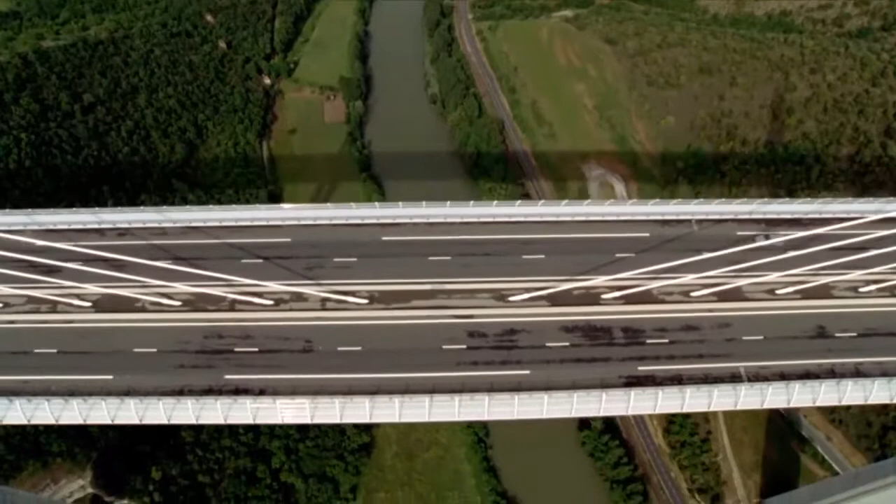It's a ribbon 2.5 kilometers long, vast spans, but a very, very slender structure. It's tree-like in terms of its cables, and the color of the cables is very much the color of the sky - a very conscious design decision. It's about transparency, it's about locking into the view. It's a humanistic vision of what infrastructure might be, and it has quite an interesting story in terms of the way it performs.

In scale, the tallest of these columns is something like 17 meters taller than the Eiffel Tower. It creates a shortcut - before this viaduct, you would have a tailback of some 35 kilometers with 5-hour delays going through Millau, through the local region, instead of being able to leap across the great valley. If you consider that something like 1,500 trucks cross this viaduct daily, and the journey time between Paris and Perpignan is reduced by 1.25 hours, then that translates into something like 36,000 metric tons of carbon dioxide saved. So the analogy with the tree is in many ways quite apt.

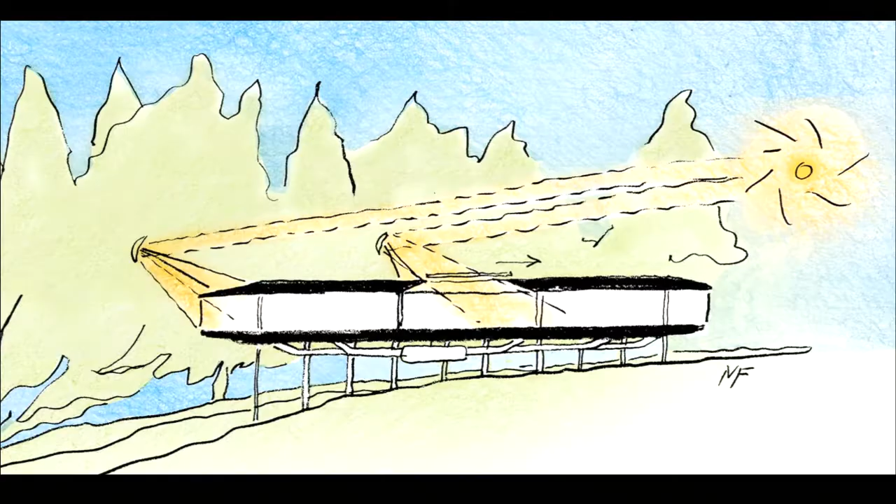The idea of the sky as a generator, which embraced all the projects I've been associated with, encouraged me to look at some unbuilt projects. This sketch is of one of several pavilions conceived for the Fred Olsen organization in the 1970s, the early 70s, and the site was a forest. Many of the much larger buildings, the skyscrapers and so on - all the principles are here.

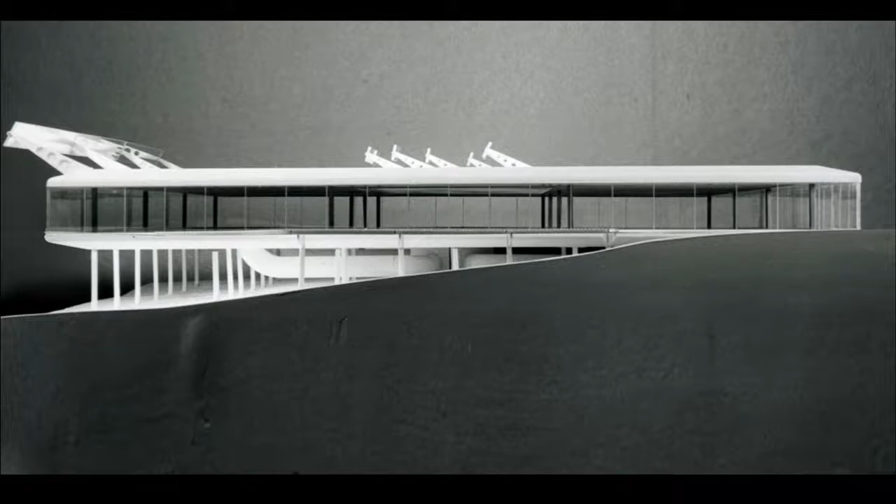Reflectors which pull sunlight deep into the building in the low winter sun, hovering over the forest floor and extracting cool air, working with nature, reducing the high energy consuming traditional air conditioning systems. Again, just sitting very daintily in its forest setting.

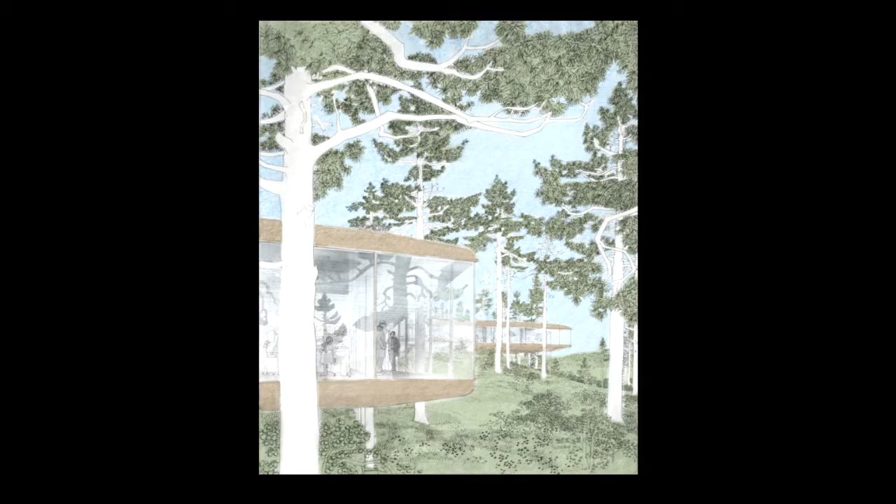An earlier project, still from the 1960s, the Skybreak House - its relationship to the landscape is much more of the landscape. It grows out of a slope, contained between two houses in a residential area, so it focuses the views, and you have the kind of poetry of feeling that you're not in an urbanity, but basically it's about the sky and it's about the distant views. This steps down the hill, as you can see here, growing out of the landscape.

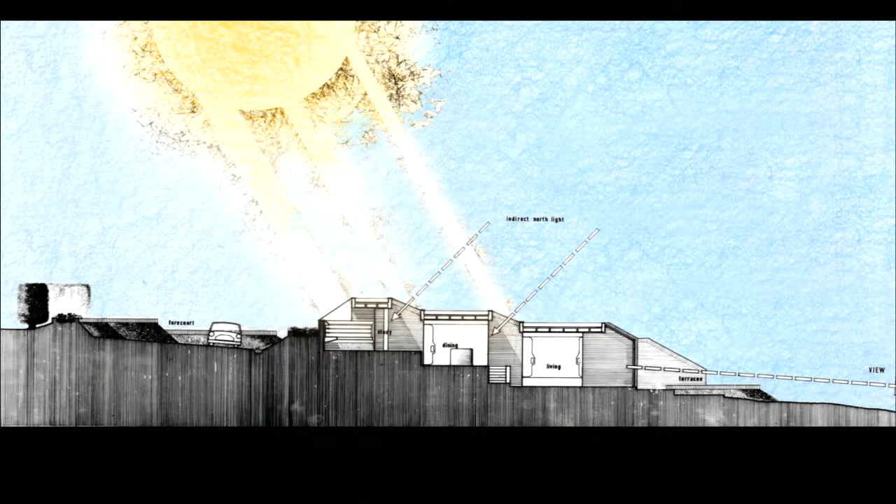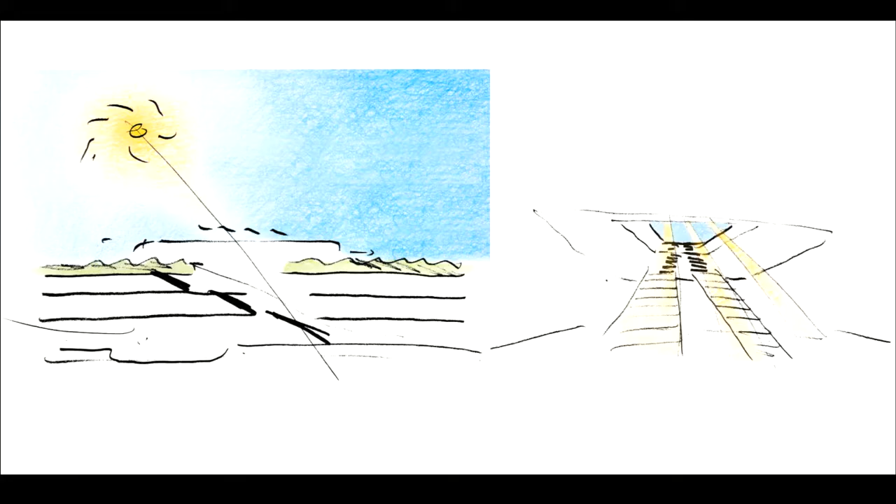If we take a slice through that building as a cross-section, again the early sketches show the sky as dominant, and when that's translated into a building, it is again very much at harmony. Whether it's for a small home or a major office complex, the Willis Faber building also of the 70s, the concept sketches, when translated, are very much about moving up towards the sky, embracing the sun, creating landscape on the roof. This becomes a transparent building at night, but during the day it engages with the clouds, with the sky, and with its urban surroundings.

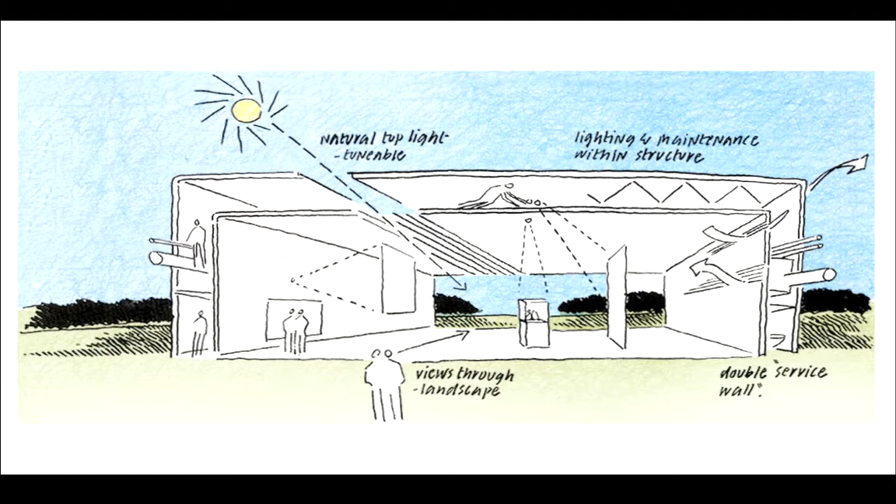Those principles of an ecological, low-energy building, a building that would be humanized and brought alive by its dialogue with nature. This is the concept sketch for the Sainsbury Centre, an arts complex and a gallery for the extraordinary collection of the Sainsbury family. And it is very much a kind of light box.

It can control the light, so it could be blacked out in the way that this space is here, or it can embrace the light.

Again, talking about light and lightness and the kind of theme of flying machines.

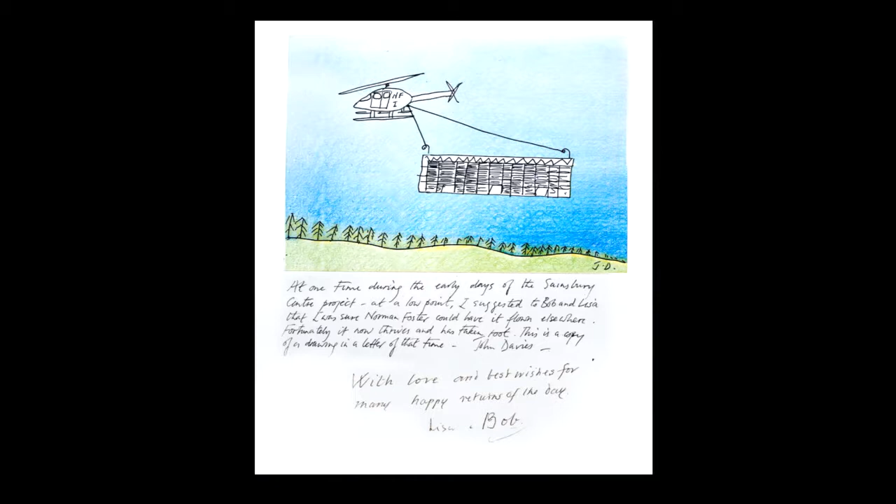Rather amusingly, on the occasion of my 60th birthday, the Sainsbury's presented me with a drawing by an artist. They were going through a rather difficult period at the time—I think it was a period of student unrest, and the building wasn't being as well received at that time as it has been since. So this artist suggested, rather whimsically, that it was so light a helicopter could come along and take it somewhere else.

That theme led, in the late 1980s, to what you might call the reinvention of the airport terminal as we know it. This was pretty typical at the time of that commission. I remember Norman Payne, who headed up British Airports Authority, an engineer, saying at the time that he felt it was time to create a new generation airport.

To achieve that, what we did was literally turn this diagram upside down. This is a solid roof—it's full of ducts and machinery, heavy equipment. It's pretty closed, you don't know where you're going. It's disorientating. It was typical of the airports of that period.

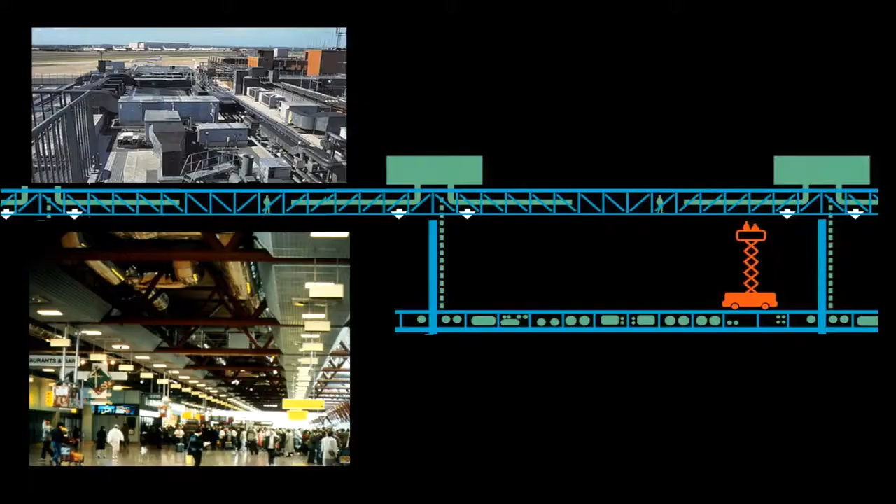If you took a diagram of that, you'd have a kind of roof structure which is more bridge-like, solid. On the left at the top, you can see what that roof would look like in terms of its equipment, and the space below, which was pretty soulless. Also quite high energy consuming, because if you're blocking out the natural light, then you need artificial light. The artificial light generates heat, therefore you need cooling—all very expensive and high maintenance.

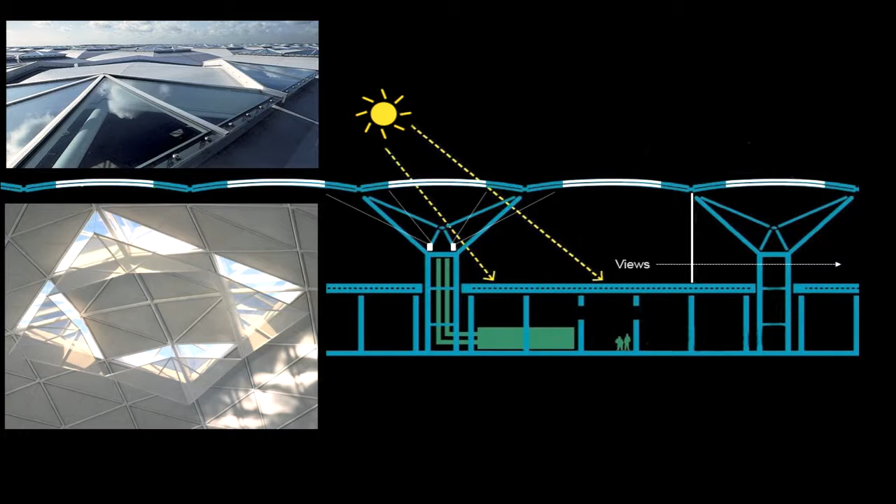The solution was, as I say, to turn it upside down, put all the heavy equipment where it sits more comfortably on the ground rather than up on the roof. It's also easier to get at. Once you bring the light in, you have a totally different experience. So it really is harmonizing with nature, working with the sky, reducing energy, and producing a more joyful place where you can really see the elements and the aircraft you're going to.

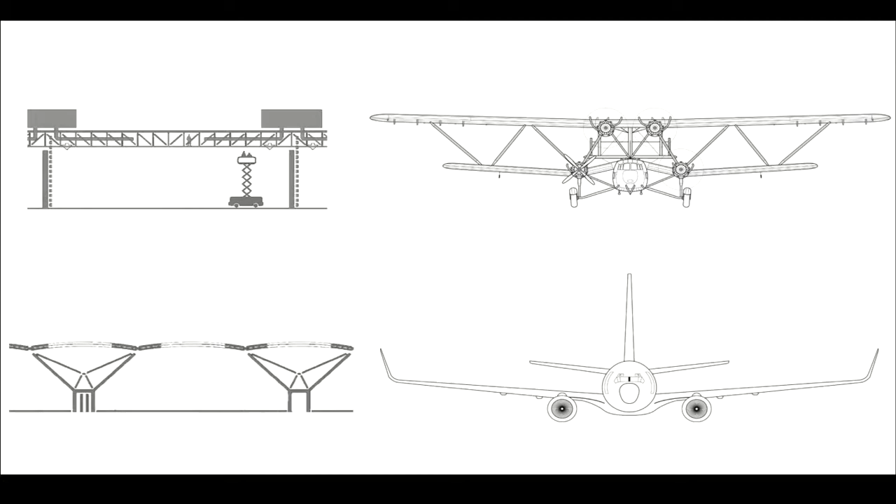It crossed my mind that, in a way, the cantilever is emblematic of modernity. There are interesting parallels between the early passenger-carrying aircraft, the biplane, which was a bridge-like structure, and the Stansted kind of breakthrough, which is very much a celebration of the cantilever—something we take for granted in terms of modern aircraft.

If one elaborated this theme further, at a particular point in time you'll see everybody is doing the cantilever steel tubular chair, for example.

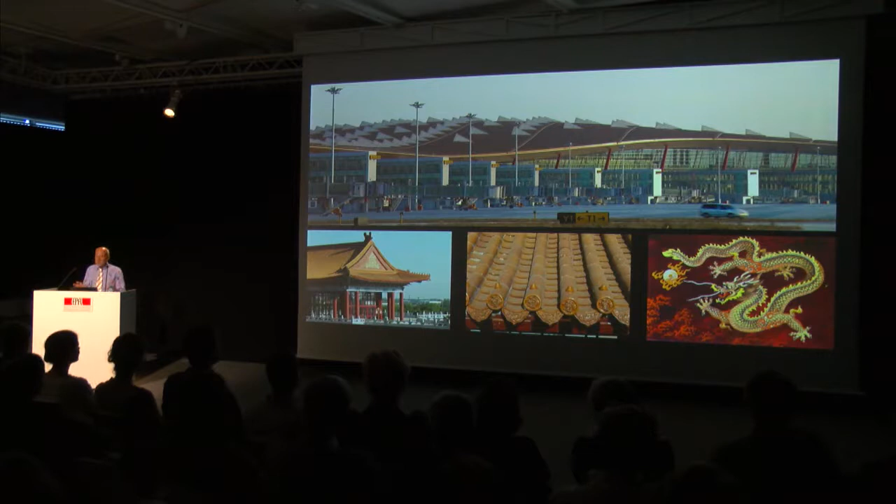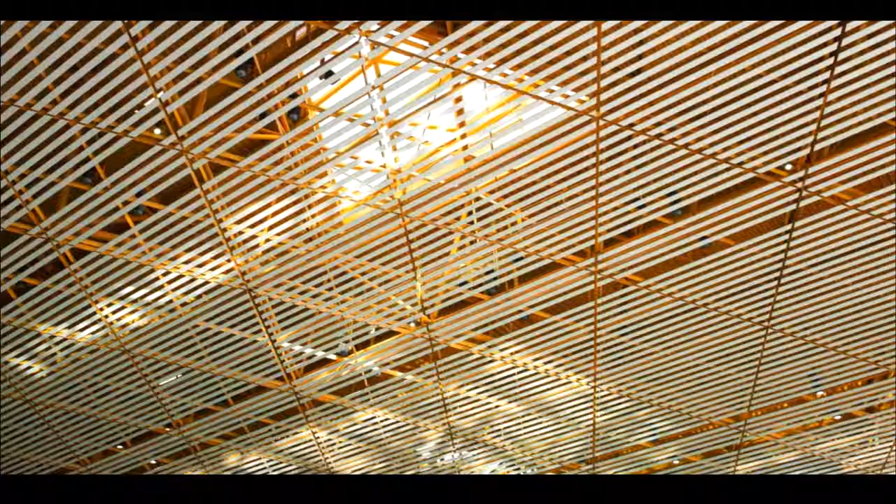In local folklore, it's not just about capturing the sky, but it's also referred to as dragon-like in its appearance, picking up on the tradition of the colors of the Forbidden City, integrating those colors we most associate with China: the range of reds through oranges, through yellows, through golds. Those colors permeate the project and color, almost literally, the sky, the great umbrella over these vast spaces. But the building is actually referred to by those who use it as very comforting.

Although it's very large in scale, if you compare this building with, say, 5 or 6 terminals at a Heathrow or a Kennedy, with an internal rail, then it is very, very comfortable.

It's at this point in the evolutionary cycle of airports that I questioned whether the next move might be to take away the columns, take away the idea of a roof and walls and connections to the aircraft all being different components, different languages, and questioned whether it wouldn't be possible to create one seamless umbrella which would curve, arch, at one point become the roof, another point become the walls, reach out and connect with the aircraft—something more organic.

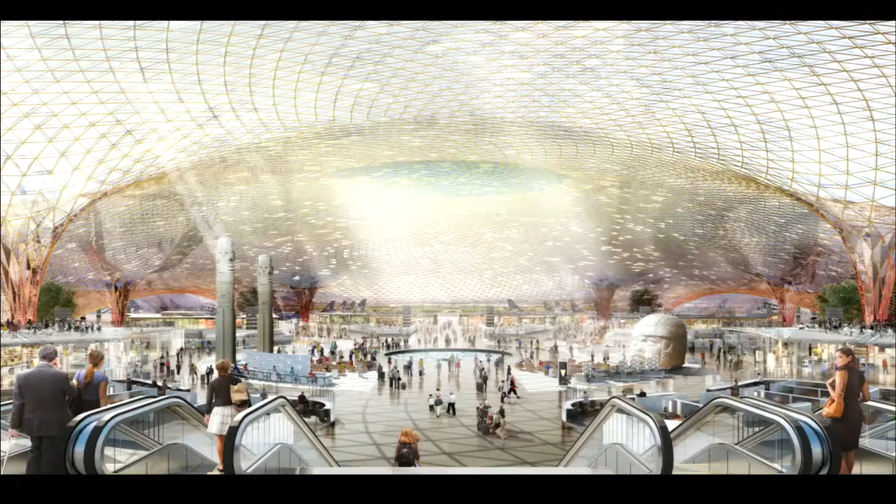Could, for example, the more traditional 36-meter span between these columns be 100 meters, 170 meters? Mexico Airport, which is smaller than Beijing but larger than Hong Kong, somewhere in the middle, is a competition we won last year, now under intensive design development, to break ground early next year. You can see here the heroic span, the way that membrane comes down to the ground.

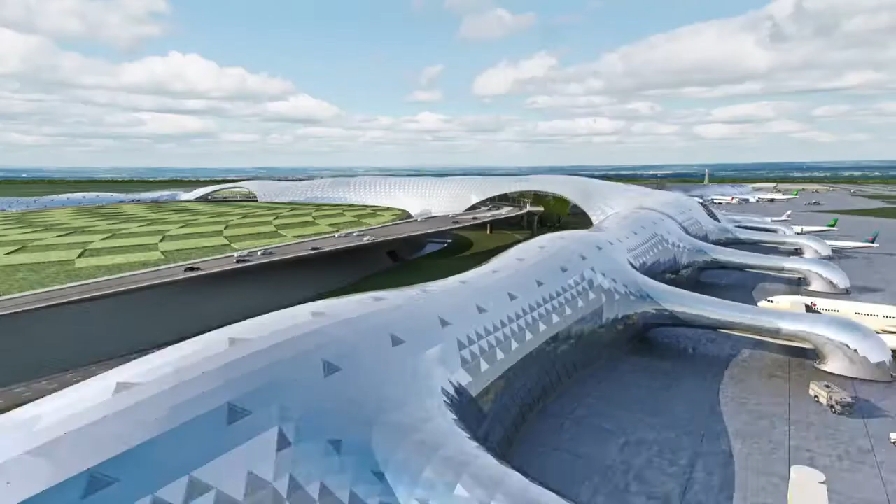We're studying this project using the medium of film, so I'll show a few clips. It's overtaken by time, but the spirit is unchanged. This fly-through shows the generosity, the scale, the quality of light, the way the shell can become funnels which bring light and water to the ground.

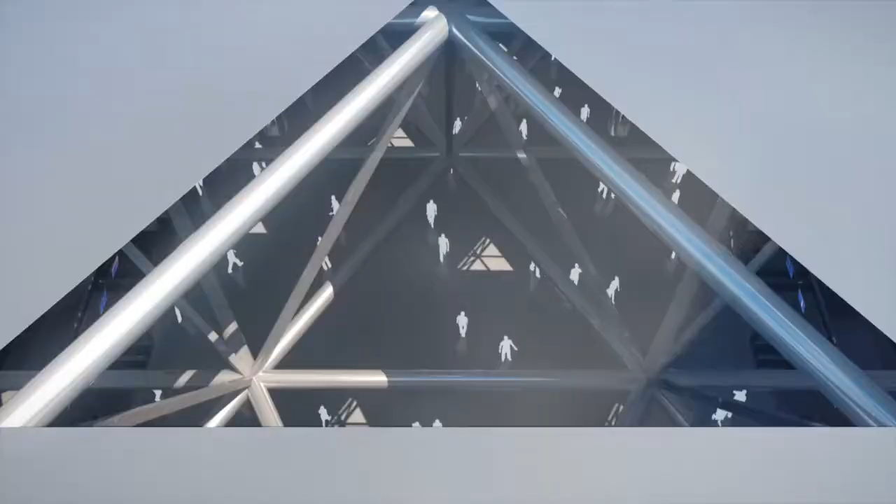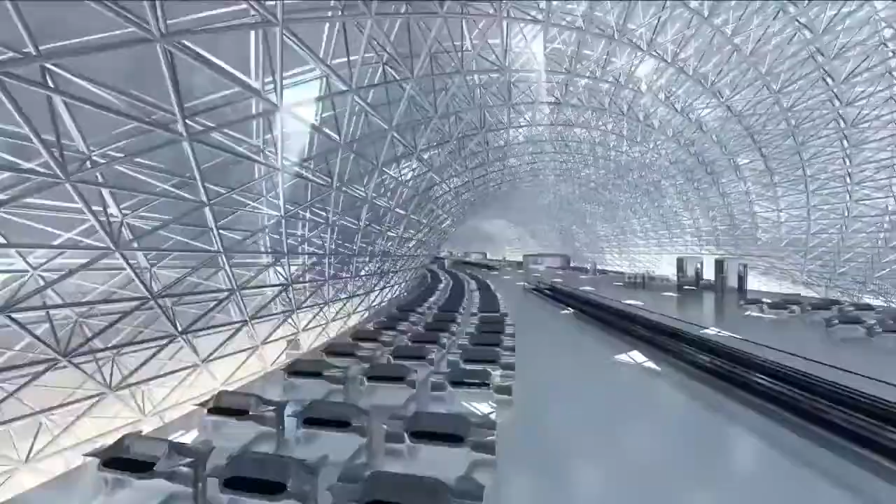The spans are truly heroic—the largest span is 170 meters, normally around 100 meters. Again, it's very much about the flow of people. It may well be a museum in spirit, and may house artifacts from the collection of the Museum of Anthropology, so it has many themes and ideas currently flowing through the project.

But these are rather designed tools to develop the concept, along with full-size elements which we look at and prototype as we move along.

That seemingly abrupt leap from the earlier generation of airport development to the Mexico one was informed by a body of work outside the world of airports. As was mentioned earlier, Bucky, who I collaborated with for the last 12 years of his life, was always referring to the world of nature, doing more with less, and the influence of nature and its structures on his work, very much about the Dymaxion, the geodesic structures.

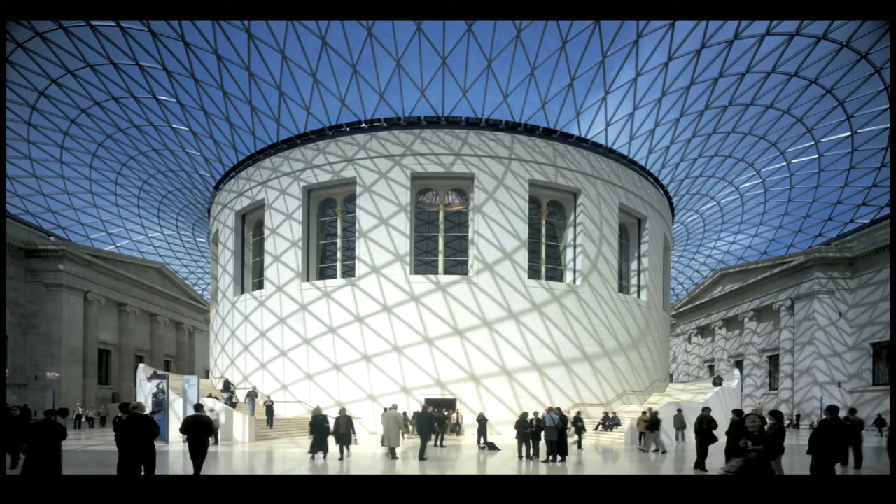It has a series of paint dots on the surface, so it's about 70% opaque. You would only know it if you took one of those panels out and could see the real sky beyond. That line of development continues here in Washington, in the Smithsonian, and here at the Reichstag.

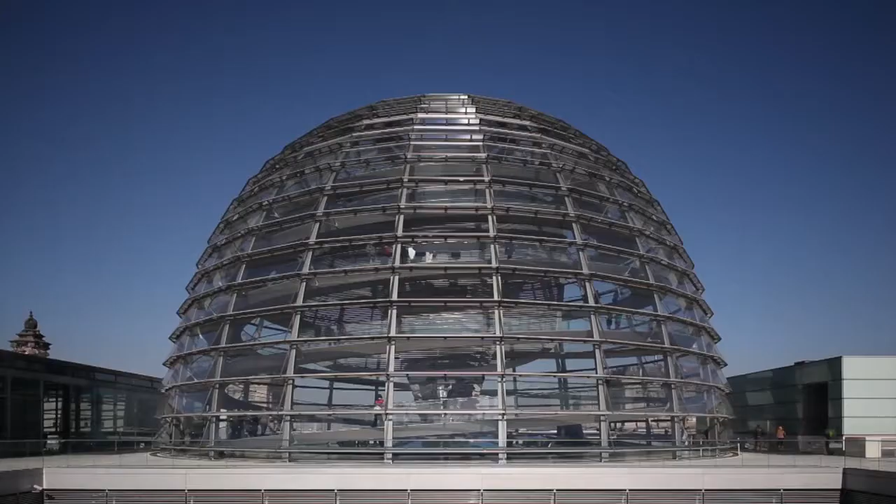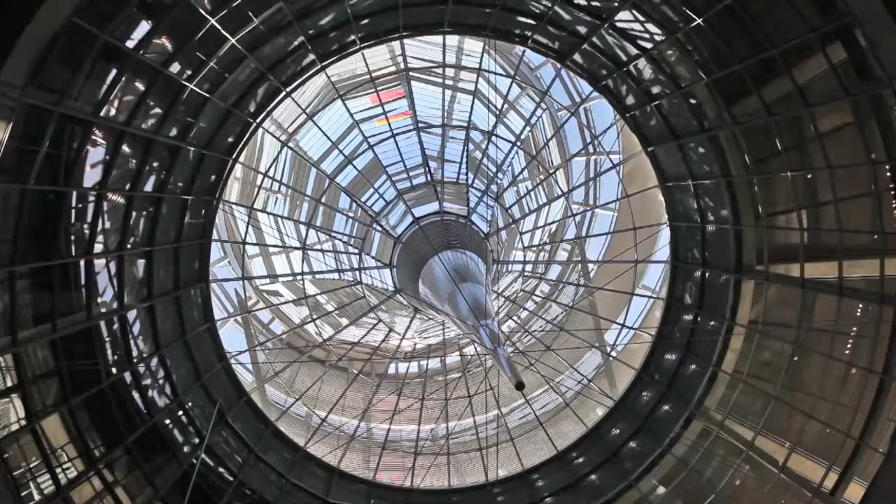The Reichstag brings a number of these themes together—capturing the view, bringing light, bringing the sky, literally reflecting the sky right down into the heart of the assembly area itself, the political focus. Here you can see the way the reflector brings that right down into the body of the building.

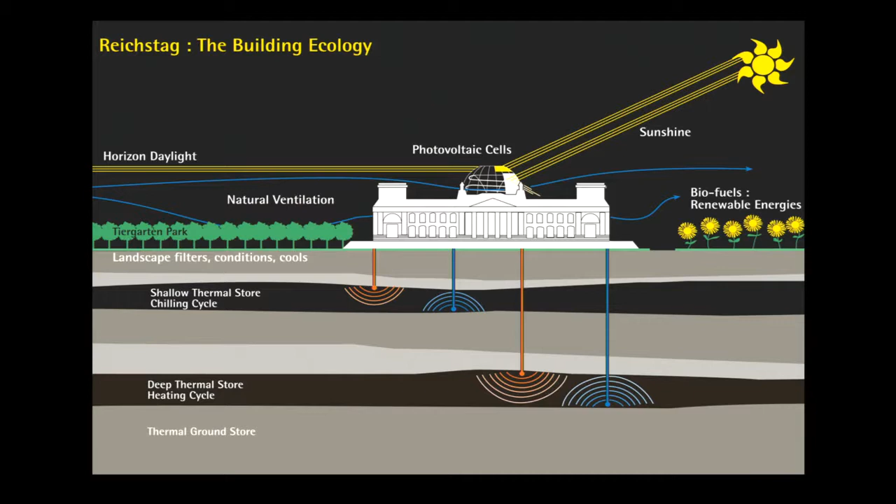But there's also a very strong agenda of sustainability behind the project. It harnesses the sun through a series of devices—geothermal, biofuels, renewable energies, photovoltaics, natural ventilation—and that capturing of the sun and the idea of the sun and sky driving a building complex.

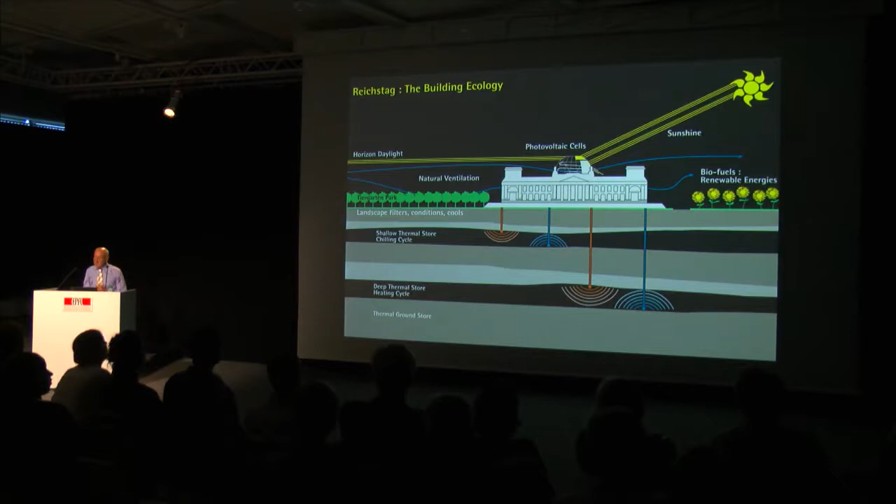It's probably taken right now to its most extreme in one experiment in the desert in Abu Dhabi, the Masdar project. This 10-megawatt energy field, 22 hectares in area, with a lot of surplus energy fed back into the grid, is driving the first third of the Masdar experimental project, devoted to a university.

There are 500 students there, 100 teachers, exploring the whole world of solar. I wasn't sure whether, working with Johnny Cox who heads our film unit, and Narinda, we discussed whether we should show the film we made to communicate the idea, or show it as it actually is now. The decision was made to mix it all up.

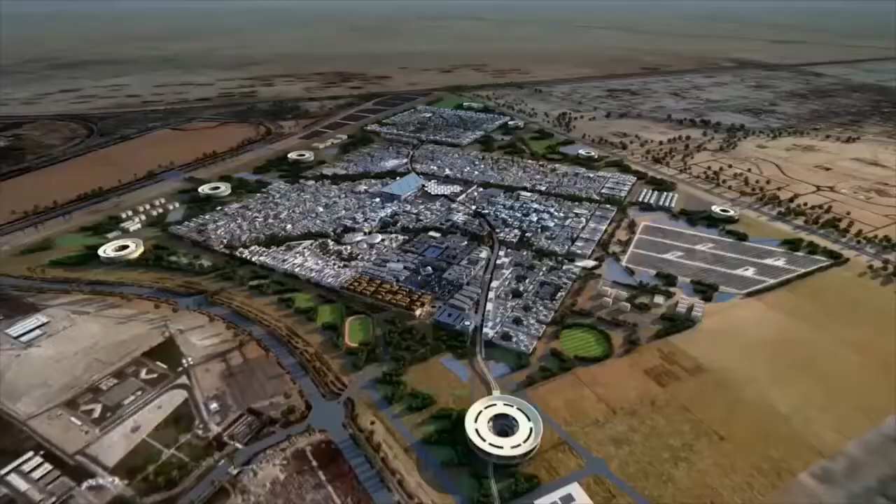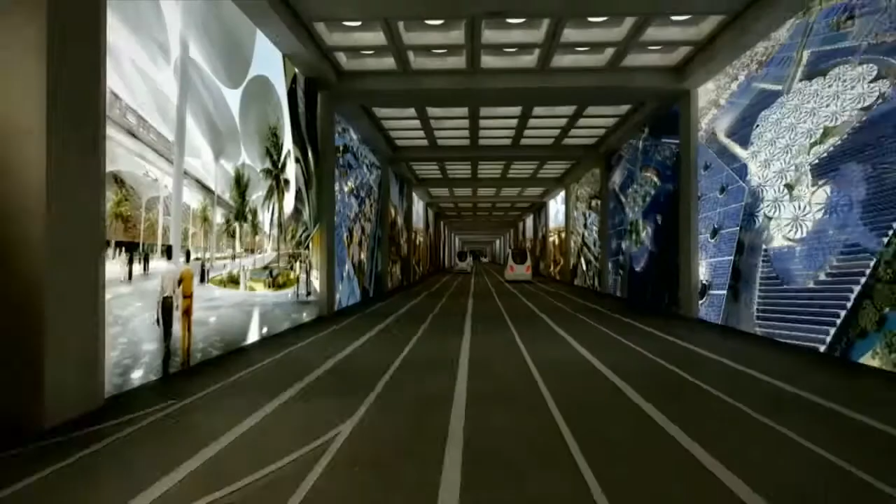It's quite interesting - I find it very difficult to separate the reality from the simulations and visualizations. But the combination of the two, I think, captures the spirit of this desert community, which uses materials of the area. It has robot cars which may drive from the outside - here you can see the robot cars and the multi-layering, with the lower area designed for mobility and the upper area for pedestrians, scaled accordingly.

So here you get glimpses of the student accommodation, glimpses of the two types of buildings - one about the university and the other about residences. They explore new materials, new concepts, wind towers, and here we morph into the reality as it is today. Quite a thriving community, again with local materials.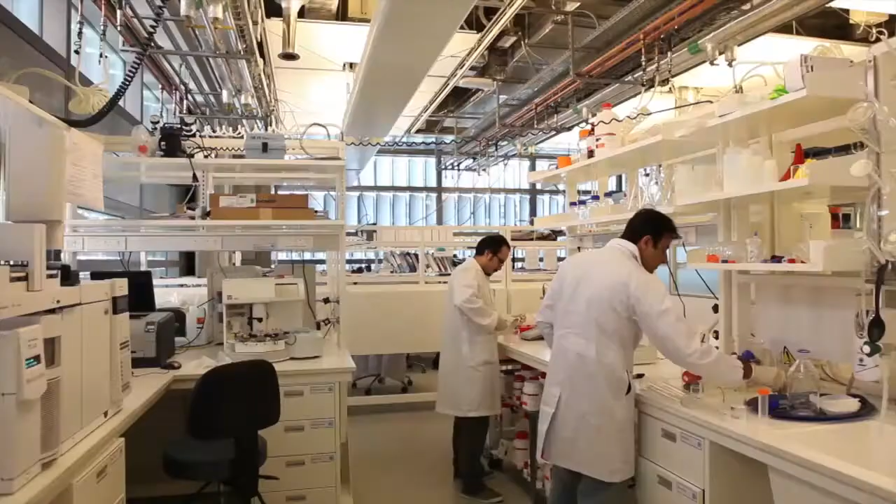The red you see is the red of the sand of the desert, and a number of explorations which are ongoing - those are the students already there. This is the building. These are real, but then these are not real, but they could be. So it's about exploration, experimentation.

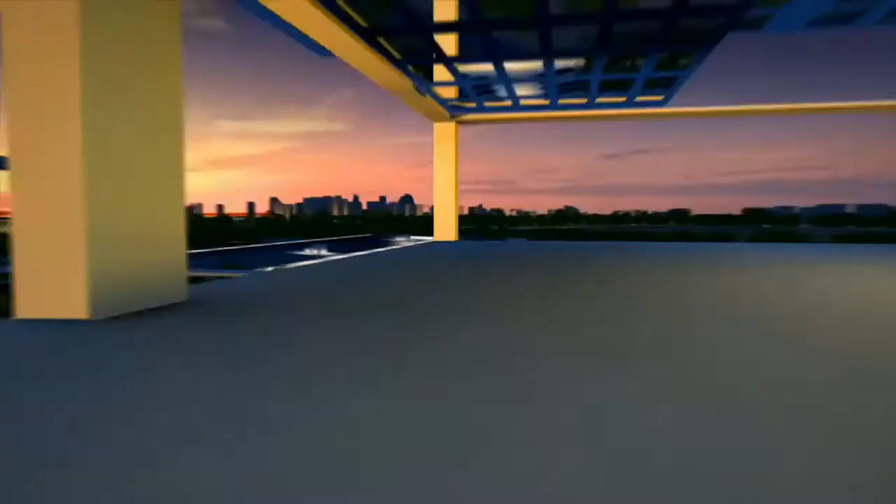It's an investment in a future for this oil-rich country, in a future which will not necessarily be oil-rich and depend on newer, cleaner technologies. So again, very much a kind of living experiment.

That was only possible by applying the lessons from native indigenous architecture in the desert before an age of cheap energy. It came out of studying settlements like this, and the way in which, in a previous age, hundreds of years - centuries back - they would capture through domestic-scaled wind towers the cooler desert breezes, and modify the temperature together with vegetation and courtyards.

So these early communities were, in effect, reaching for the skies, rather in the way a medieval development like San Gimignano in Italy would be kind of mini skyscrapers. So I don't find it surprising that in cities like Chicago, which are totally flat, you have this kind of convergence of vertical buildings.

This is one of my favorite images, so it's an excuse really to show it, because I love the aircraft and the fact that it's flying along the New York grid, and in the background is one of my favorite buildings, which is the Van Alen Chrysler building of 1931.

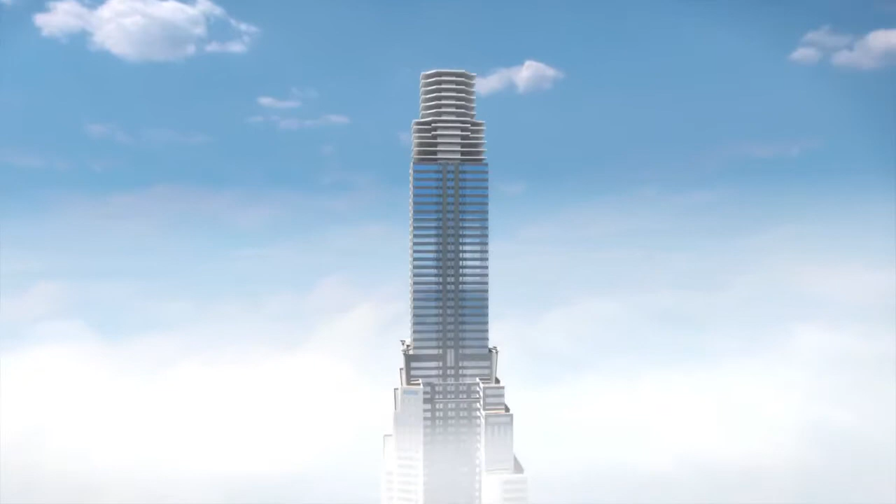If one kind of took that apart and sought to reinvent the typology of a high-rise building, then really what you try and do is take that core out of the center - and that's exactly what we did on Hong Kong, splitting it and putting it like bookends on the side.

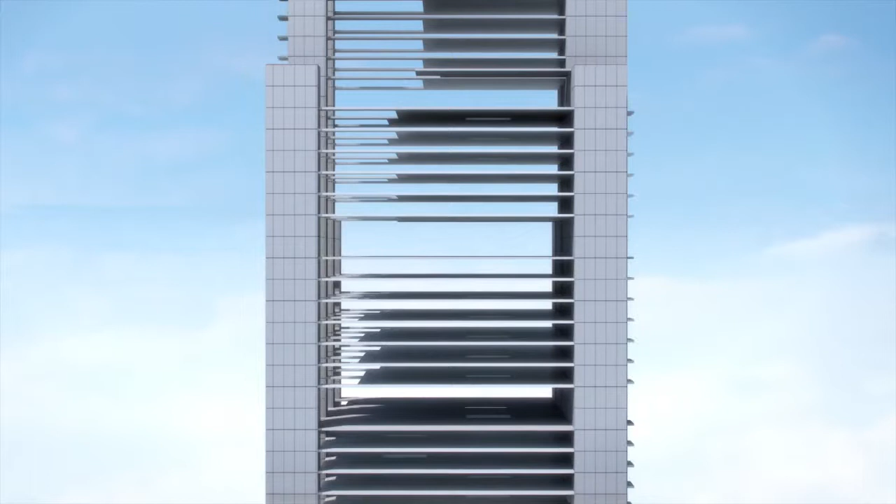So all of a sudden, you've got free, flexible space, which is much better to look out on, to capture the view, and also enabled this bank, the only one of its kind, to be able to put a dealer floor which needs unbroken space for good communication. So it's very much about the social dimension as well.

Talking about those reflectors in the Vestby building in the Norwegian forest, that idea resurfaces here. You see that on one facade there is this mirror that captures the rays of the sun. On the right-hand side, you can see the way it illuminates not just the main space of the banking hall, but the pedestrian space below it.

And here, looking down, you actually see the quality of light which illuminates that. Interestingly, the floor of the bank becomes almost like a community centre at the weekends, and we have since developed many variations on that theme.

And the next move was in Frankfurt for the Commerzbank. Instead of creating two towers, to create three towers of cores, and to spiral gardens around that, and to relate those gardens as lungs for the building, rather like the tree that I showed at the beginning. In other words, the ideal building would breathe, and it would work with the seasons.

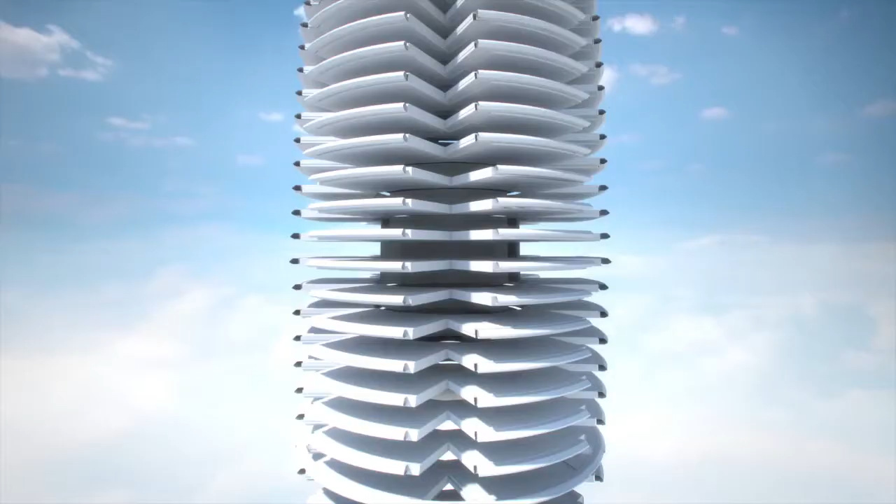And that is the building here, with the big steps, the kind of cuts into the facade where the gardens are. This is the first ecological skyscraper in the sense that it uses natural ventilation for something like 70% of the year. Those gardens interrupt along the height of the building with a central atrium, then the next step was to explore the idea of a spiraling garden that would go around the perimeter of a building, like the lungs, a spiraling lung rather than a central atrium.

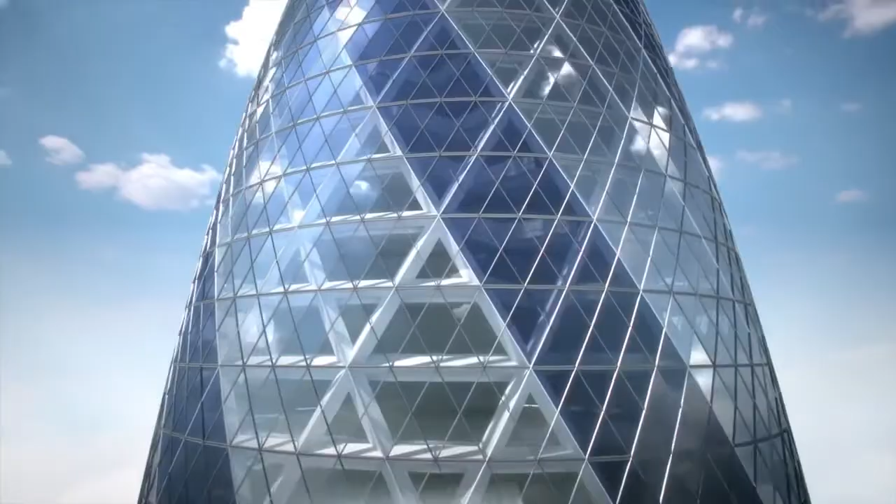Again, a whole series of experiments to explore the potential for the reinvention of the tall building. And unusually, the pinnacle of this building, unlike a conventional tall tower where you go to the top and find all the machinery and equipment which drives the building, here it's very much about the view, about the 360-degree horizon, and of course the clouds and the blue above.

Again, those principles taken in another form atop a historic base in Manhattan, the first LEED accredited building in New York, a very green agenda. Here the core is taken again from the center and put on the outside edge. In the spirit of those Dymaxion geodesic, triangulated structures, this is saving something like 20% of steel, and the cost of steel relates to the cost of the building, and the steel is recycled. So it is a very green building which sits quite gently on its site.

And when you're in the base, it's very difficult to realize that you have the kind of monumental load of a building above. That idea of a structure which is very delicately related to its site, probably the most extreme example of that is the Collserola Tower that we did in Barcelona at the time. Oops, excuse me, leaping all over the place there.

Not intentional to create a kind of space-age quality to it, but at least one very interesting Spanish magazine, AV, from time to time has, over the years, picked up on the kind of analogy between space and the buildings, and the lunar dimension. On the right-hand one, that was provoked by the Apple building, which you see as a flying saucer in the distance there. It would be very easy to imagine that that was a kind of one-liner as a circular building.

But it did actually grow out of a very long period of gestation with Steve Jobs, where we questioned the very nature of a creative campus in California. This red line is around the site that he acquired from Hewlett-Packard. He had a very close association in his early career with the founders of Hewlett-Packard, so there was a rather nice twist that he would get this site.

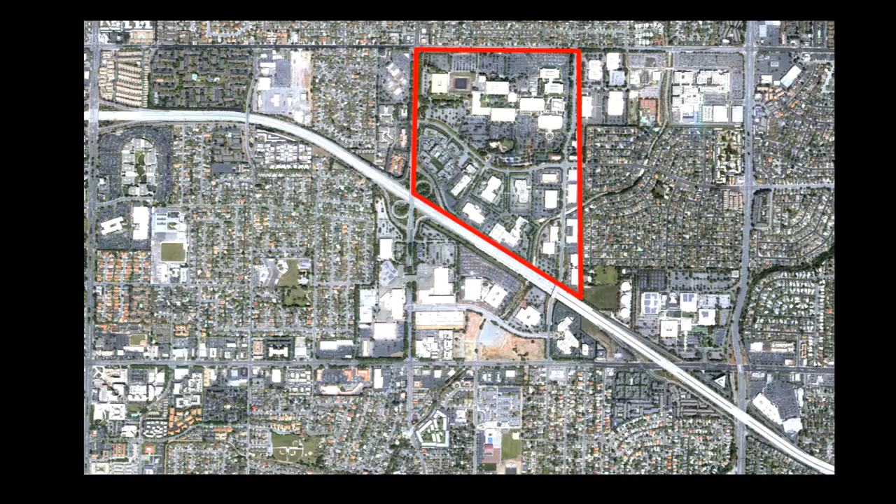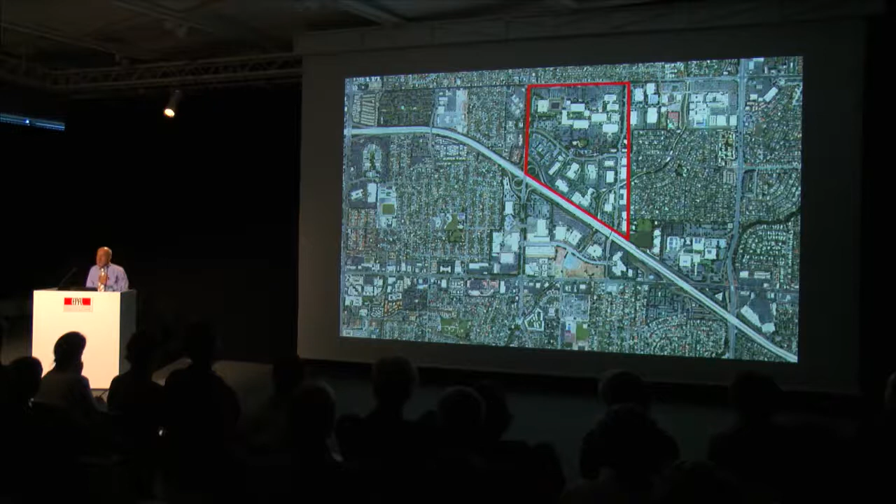Typically here, if you could go close up to it, you would see it's mostly probably about 16 or 17 buildings as individual buildings in a landscape of asphalt and cars. Steve, who remembered this area of Cupertino as being the kind of fruit basket of the United States with orchards, citrus fruits, and so on, really wanted to capture that landscape. Together, the idea emerged of a single large building that, in relative terms, creatively, would have everybody under one roof, so it would be great for internal communication.

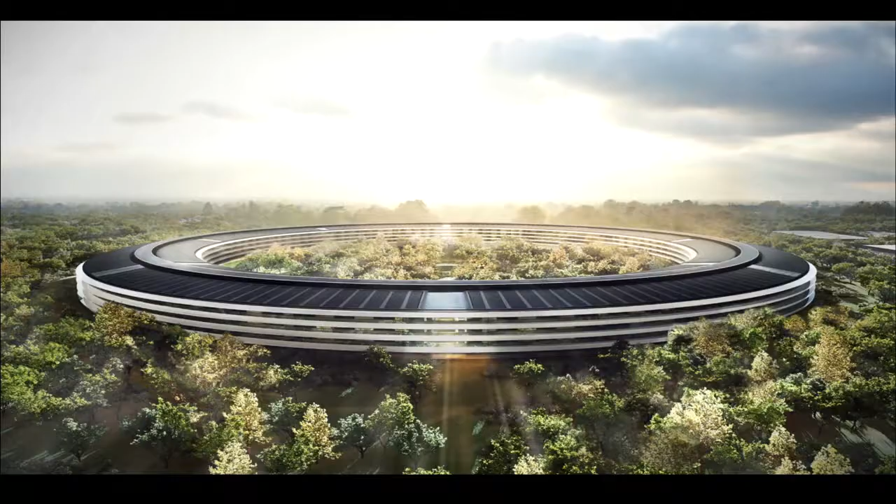That was evolved through deconstructing a circle, creating an edge building, and eventually, over quite a long period of many months, it morphed into this single building. The outer circumference is probably about 1.6 kilometers, and it's a third of a kilometer across in terms of its central part. The site is 76 hectares, and 80% of that is landscaping.

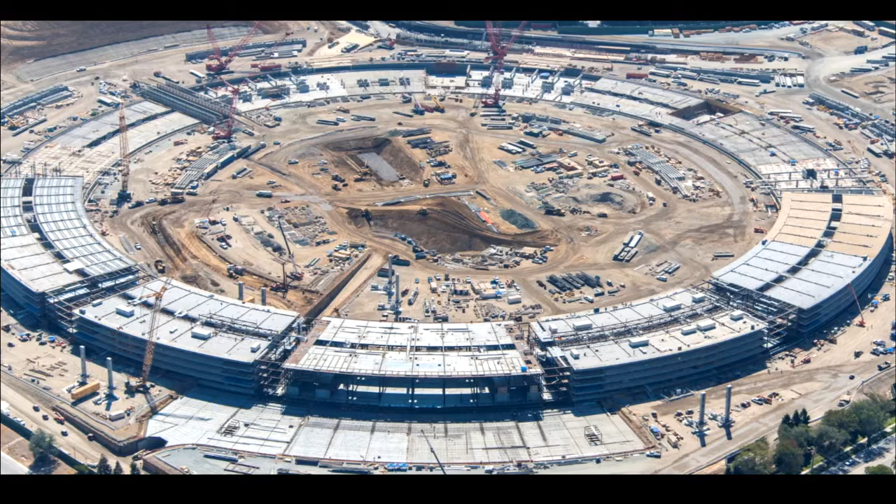It's a pleasure garden, and this is how it was last week. This is an up-to-date photograph. But the popular press, every time this building is referred to, it's always about 'cleared for takeoff,' like a spaceship. Spaceships, liftoff for Apple, spaceship is landing.

I've really reflected on why that is. There are recurring symbolisms: the space colonies that were envisaged in the 70s, in the early period of NASA, were all about circular forms, and the Kubrick film, Space Odyssey, was again on that theme.

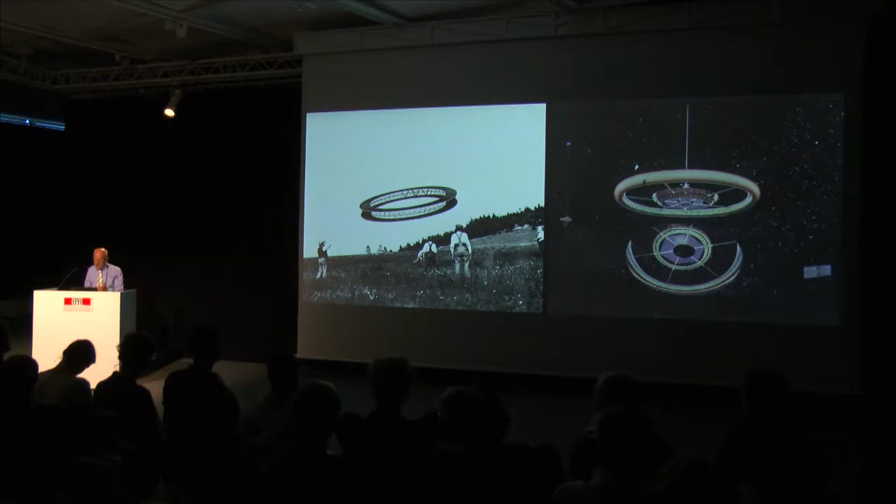And Alexander Graham Bell, with his wonderfully structured designs, anticipating Buckminster Fuller and people like Barnes Wallis with his circular kites, again all kind of evocative of flight.

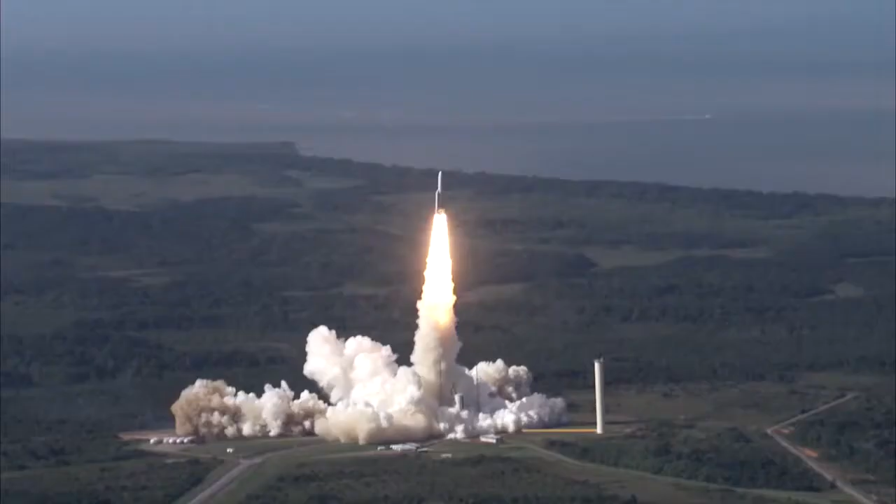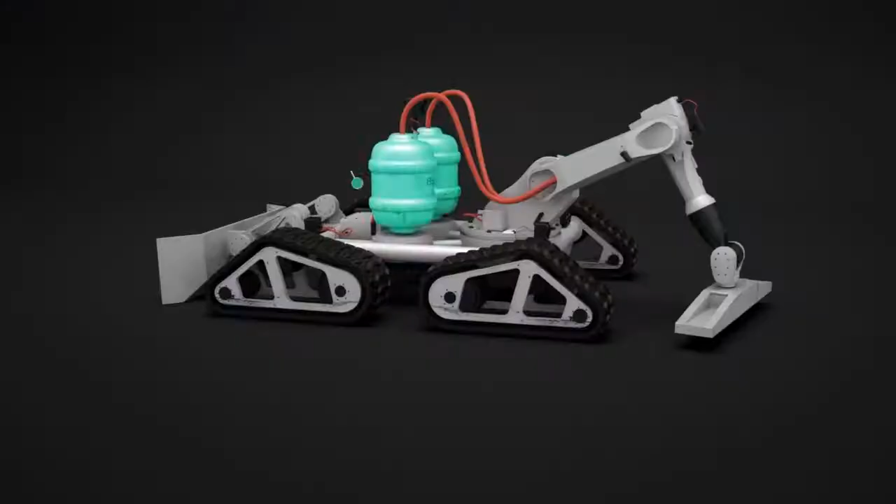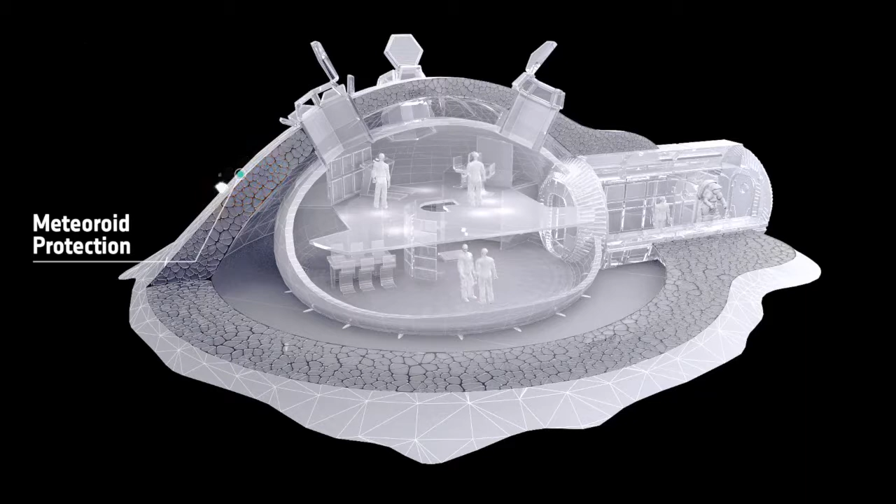And this is our project, which we did in collaboration with the European Space Agency, and it's about how you put a habitation on the moon. The principles are that you take out to the moon equipment that will work with the material of the moon itself, the dust, called the regolith. The closest you can get on Earth is volcanic dust. So it takes out a 3D printing machine with liquid, which is a binding agent, mixes it all up together, and then creates this protective environment. You can see the airlock is the thing that arrived and carried the 3D printer. And here you can see those 3D printers crawling around, making new dwellings.

And this is truly a hostile environment. I mean, it's plus 100 degrees centigrade down to minus 170 degrees centigrade. You have to contend with flying meteoroids, very, very small, but 10 times the speed of a bullet. So having the equipment, this enclosure is something like 1 meter deep, and that is informed by a study of the cellular structure of bones. So it's incredibly strong.

And the thing I found fascinating was the absolute strong connection in terms of the concept and the way the habitation is created with the African drone project. If you're looking down on Earth from the moon and you see continental Africa, the principles are almost identical — working with the material that is available, using a high technology form of transportation to bring components together which you assemble. But instead of robots, you want as many people as possible employed in the project.

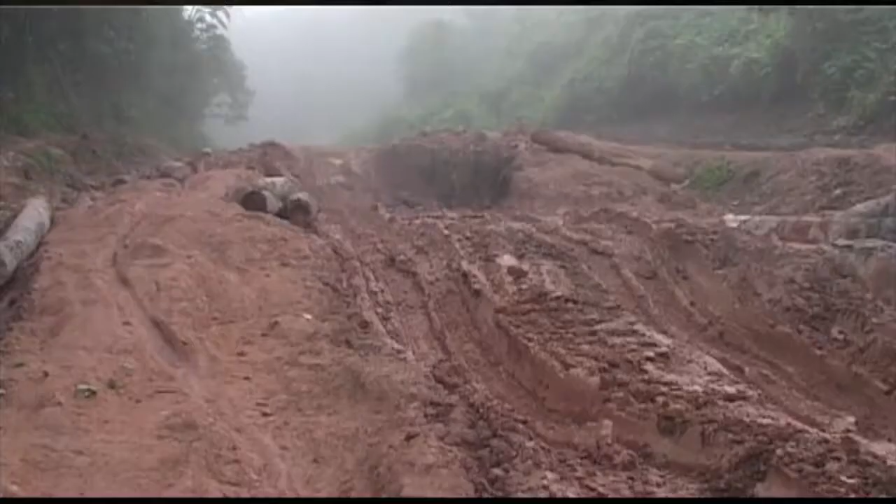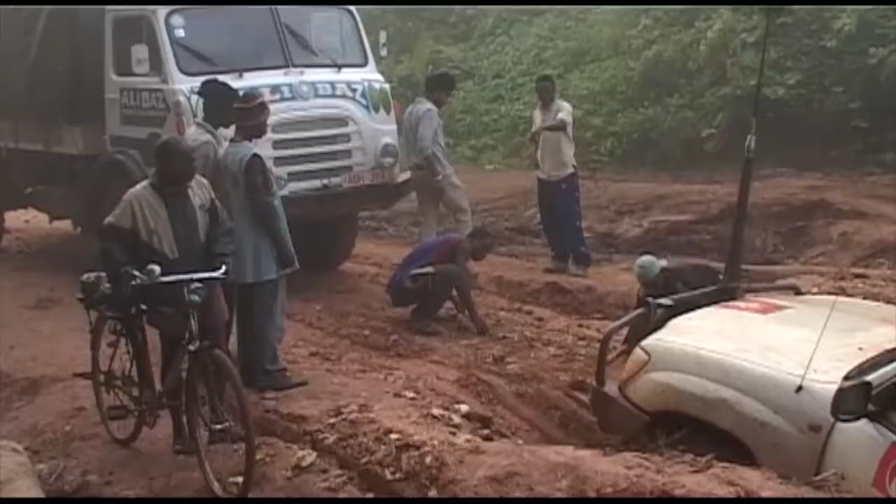You can talk about it later. This is Narinder getting to his school on the main road, the main highway. And there he is.

So imagine that this is delivering vital medical supplies. How do you shortcut, how do you leapfrog infrastructure? If Africa is 1.2 billion people now, and by 2050 it will double in size to 2.4 billion, and 1 in 4 people will be African on the planet. And by that 2050, 70% of humanity will be urbanized in cities. And that, I think, raises all kinds of interesting questions.

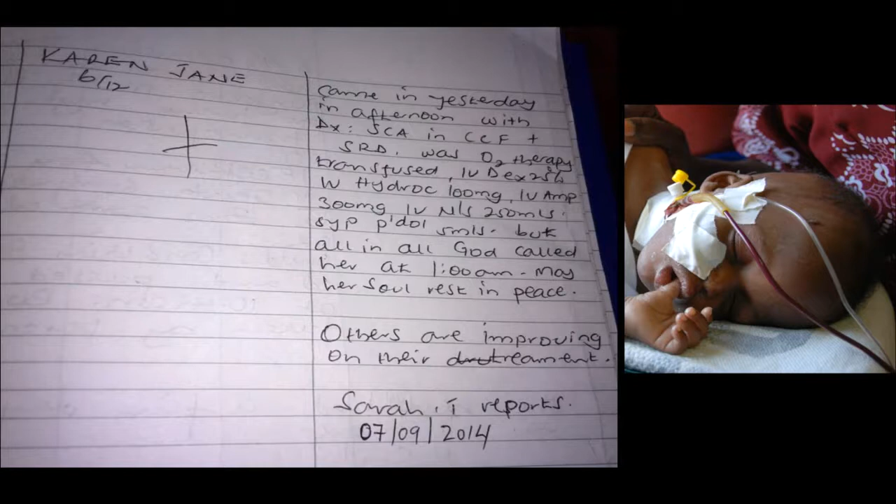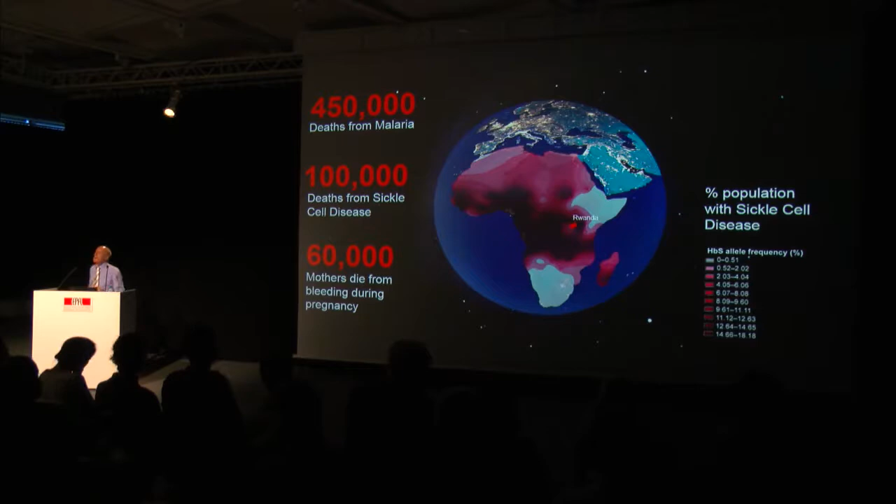Jonathan photographed this note about this poor child who died waiting for blood, 6 months old. And this is the hospital report. Why blood? Because in a year in Africa, the figures show 450,000 deaths from malaria, all blood-related, of which 100,000 are from sickle cell disease. And of course, this drone network could be transporting blood, but it could also be transporting the vaccines which protect against sickle cell disease. It's interesting, the incidence of that disease is shown by the degree of darkness of the red. And Rwanda there, one of 54 countries — interestingly, all those 54 countries in Africa together produce about the same amount of energy as Spain — and 60,000 women die from bleeding during pregnancy.

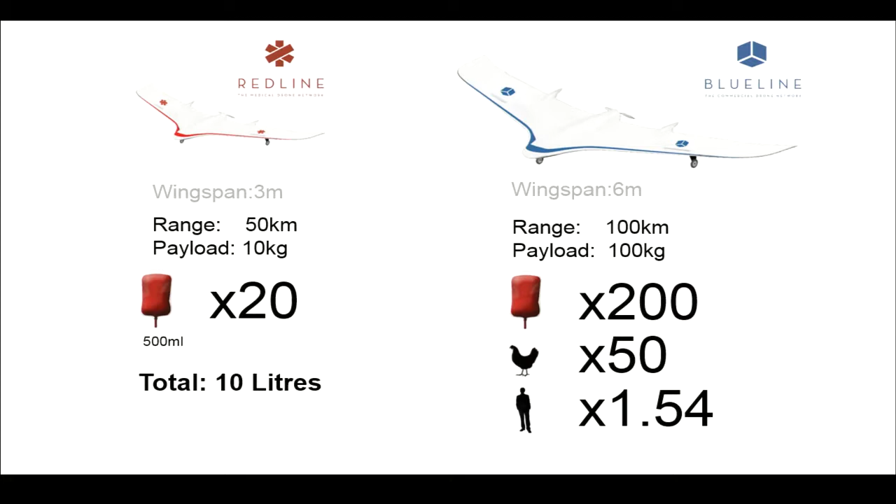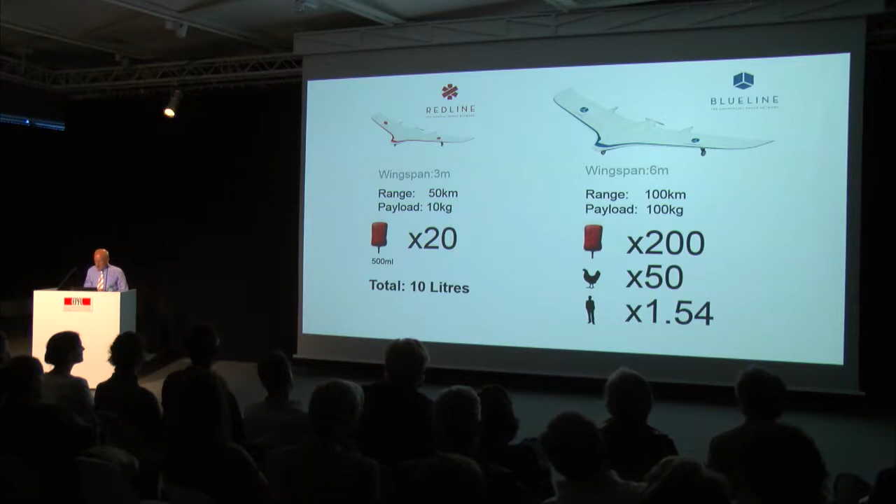So the concept of Redline is a drone with a 3-meter wingspan that has a payload, and that payload could deliver, amongst other things, 20 adult blood transfusions. The Blue Line, when you double the wingspan, interestingly the payload goes up by a factor of 10. So Blue Line could deliver, just like the components that made the buildings on the moon, the components that enable the drone ports to be built by local labor, creating a legacy that goes beyond.

Narinder's experience in Sierra Leone led him, with Jonathan's extraordinary depth of knowledge and experience of Africa, to the idea that the drone port would not just be about drones. It would be a catalyst bringing together a whole range of possibilities: civic events, local businesses, tech hub, post office, employment, medical facilities, education, school, market, vaccinations, counseling, solar charging. So very much a network in its individual constituencies.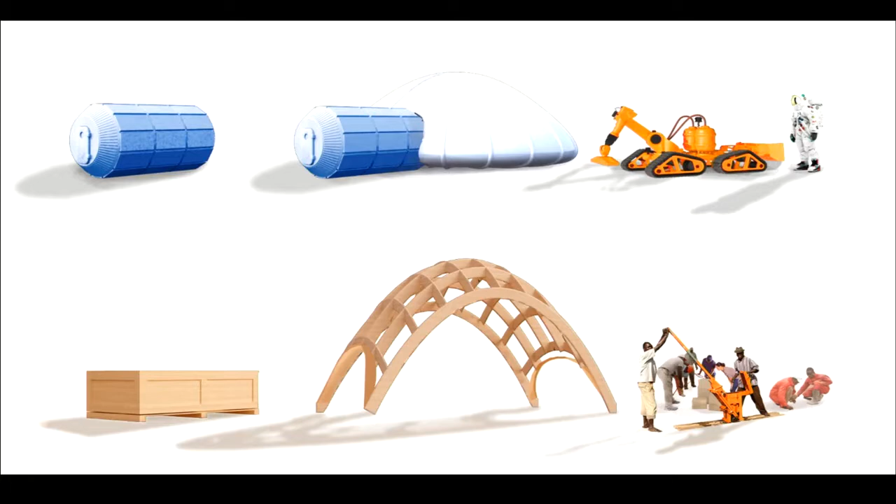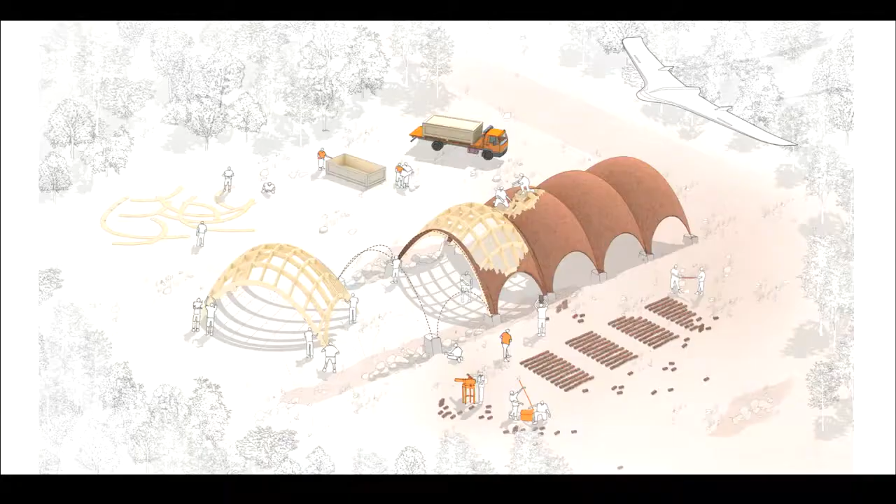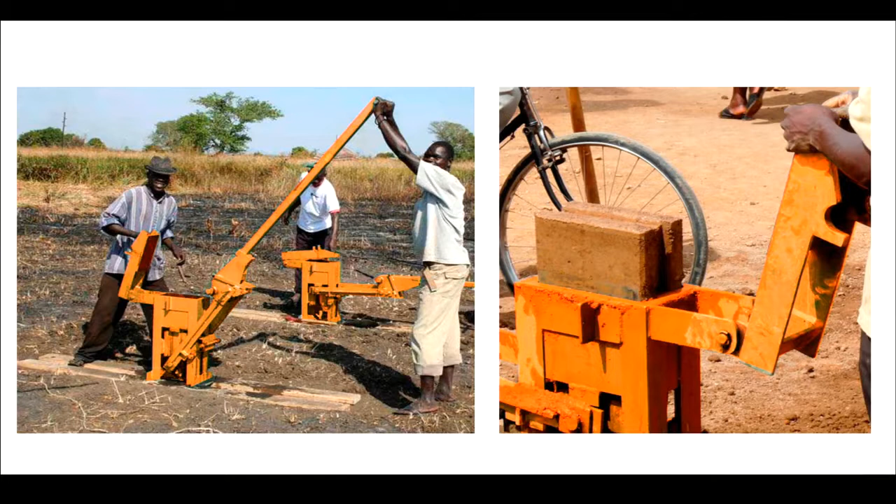Just to elaborate on that parallel with the lunar project: in one case it's a robot, in another it's a workforce, a series of components, a kit of parts which enable local available material to be processed into a building component. Here you can see the way the guide formwork is erected. There would be templates, the formwork itself giving the layout, the mapping for lighting and wiring, and the machines which would be distributed, delivered, as components assembled here.

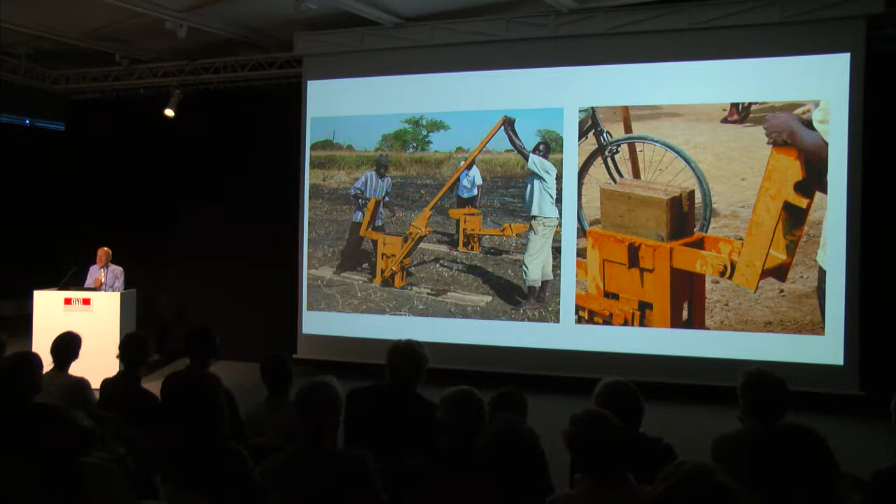This was the machine which was part of the story of the Sierra Leone school. Each one of these machines would cost $2,000. With the binding agents, they enable individual bricks and tiles to be created locally on site, and then with fast drying adhesives and minimum formwork, very, very beautiful shells.

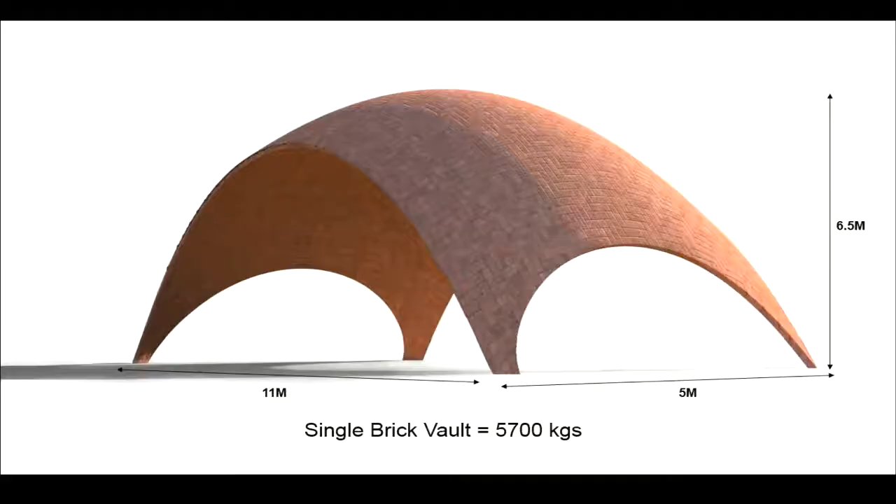Very much, if anybody knows others of my heroes like Guastavino in New York and his extraordinary creations - this tradition of vaults which are locally made and very much of the terrain, so that when you see the color of this in the landscape, it is the color of the landscape.

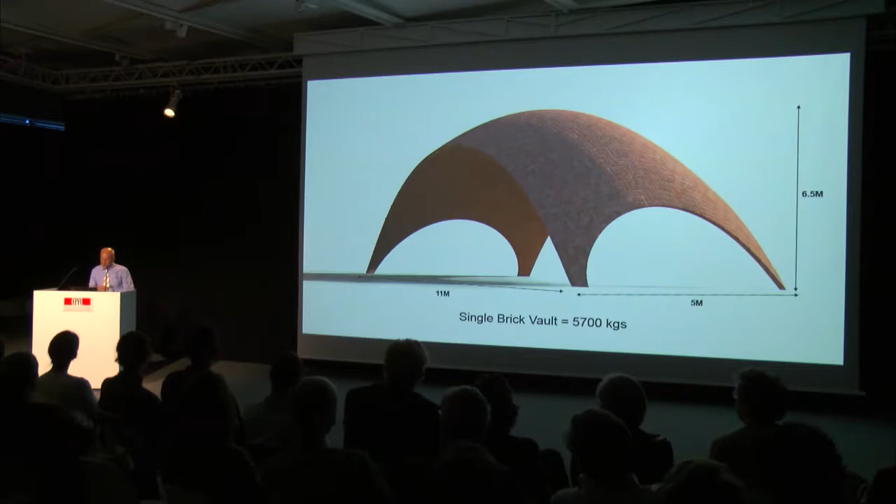As an earlier point right at the beginning, they touch the ground very lightly, so they're very permeable in terms of cross-ventilation, access, community. Narinder gave me a little story about elephants: he was out with a trekker in the wilds, and the trekker stopped them and said, 'Just look at you, you're tiny, you make all this noise, now watch this elephant.' The elephant goes past and it's absolutely silent because it touches the ground lightly. The brick vault is coincidentally the same weight as the elephant - learning more from nature.

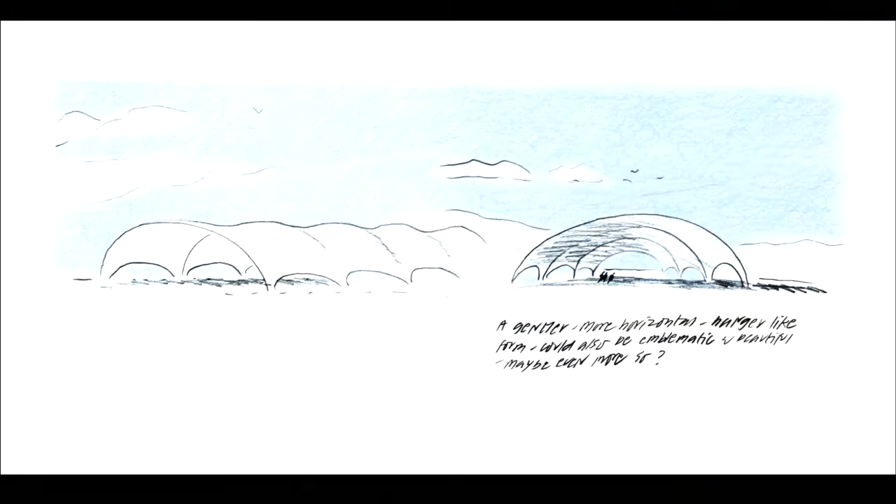We are still exploring the shape of that drone port. And Narinder and Johnny... oops, I pressed something, do you want to come and get rid of that signal for me?

Got it. So I conclude with their film, which communicates some of the things I've been talking about, and gives a kind of spirit for the architecture, the social agenda behind the building, and the beauty of the drones themselves.

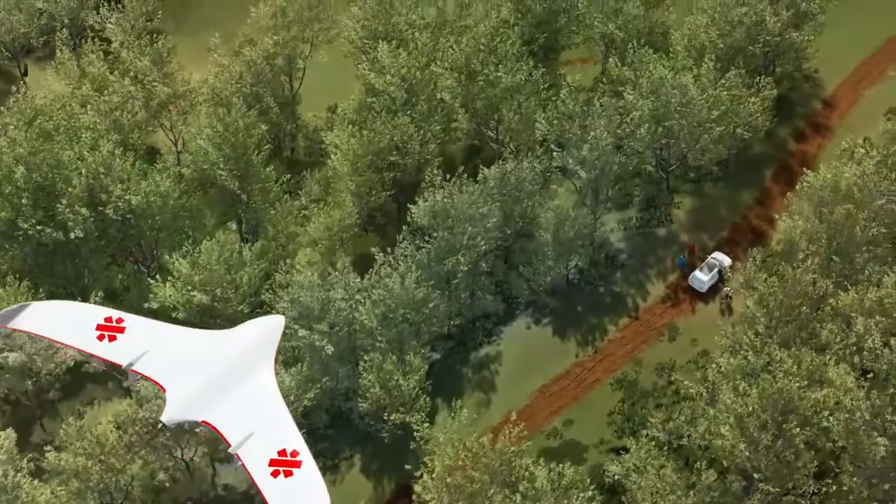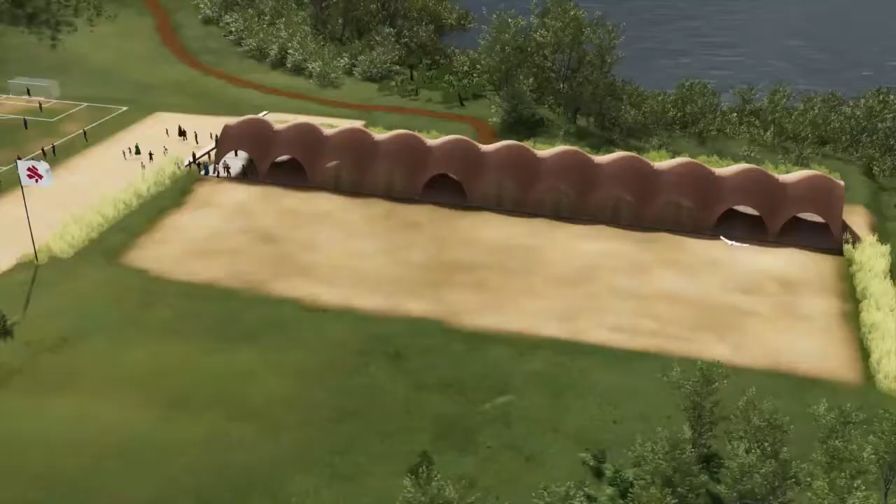There's the Land Rover stuck in the road, and this drone is going to do its job in one twelfth of the time of that stuck Land Rover down there. And so here it's coming. As a pilot, I said, why would you have tall grass on the edges of the landing strip? And of course, if you overrun, you have a soft buffer. So the landscaping is also functional.

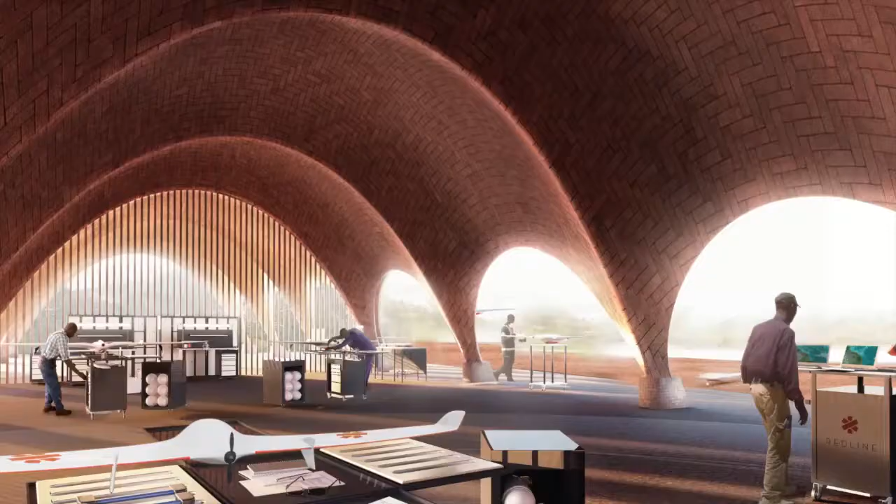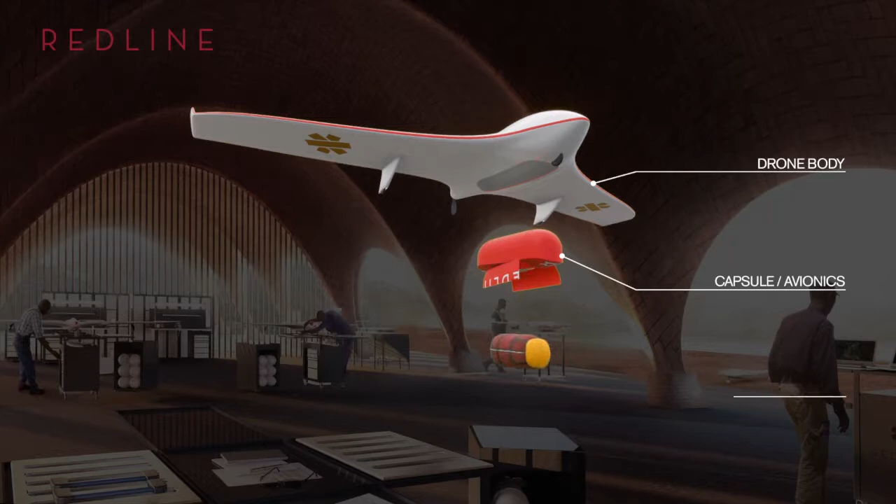Here you can see the drone. The pod itself is removable, and that is the brains of the drone, programmed for the route. It takes the payload, essentially high-tech plastic skinned foam, very light, bringing together the soaring abilities of a sailplane, but motor assisted. This could ride on thermal upcurrents, rather like the glider image I started the talk with. It's running parallel with the lake.

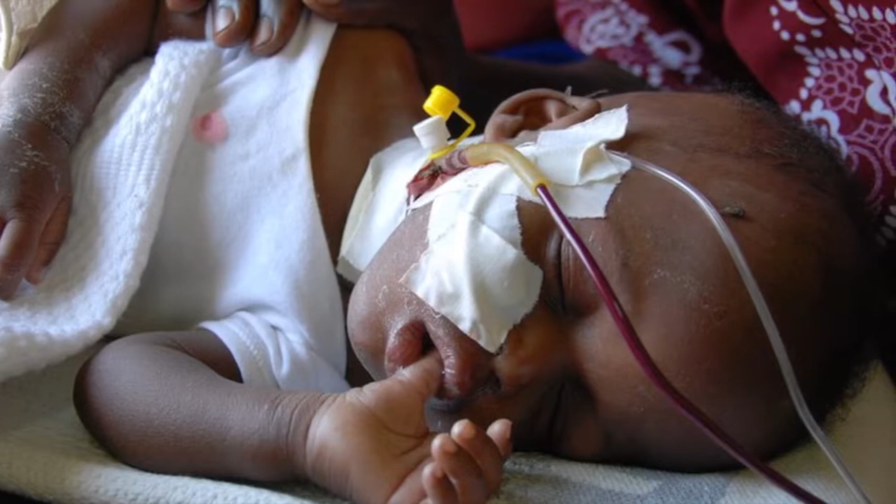It can also overfly and parachute vital supplies down - the modules can be smaller. That's a reminder of the way shortened time could very much save lives with fast deliveries, not just of blood and vital components, but also things like replacing damaged parts for pumps, providing water.

The social market dimension, and having a civic presence on the skyline, more than just a utilitarian stance. So that really concludes Jonathan's vision of a future Africa.

As Narinder pointed out on the way over here, this is in its earliest stages, and in very little time, if this revolution takes off, then the sum total of drone ports on the African continent put together would make the biggest airport in the world look very small. Thank you.

Thank you very much. This was an impressive journey. A lot has been said. I understand now why you changed the title from Architecture in the Sky to Architecture of the Sky. If you agree with this, can we continue with maybe some questions?